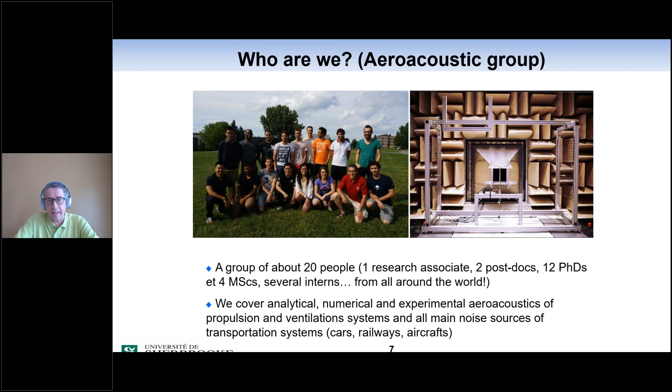And I would say all main noise sources of transportation systems, from cars, railways to aircraft. And we, as I said, we have a nice experimental facility. So this is in the next slide, please.

So if we start with the acoustic experimental capabilities, we have coupled reverberant and hemi-anechoic rooms first. Then we have a unique, very low turbulence level anechoic wind tunnel, so a very quiet wind tunnel. We have a PIV laboratory, a supersonic blowdown facility that you see at the bottom right. And we have skills in different experiment fields, like far field noise, wall pressure fluctuations, hot wire anemometry. We're able also to do some flow visualization, from Schlieren techniques all the way to tomographic PIV.

Now, in terms of numerical expertise, it goes from RANS to LES to DNS, and you have an example at the top right, using both Navier-Stokes and Lattice-Boltzmann methods. Now, in terms of analytical expertise, we have long-term research on analytical modeling of airfoil, fan, and turbomachinery noise over 20 years. This is in large part due to a very strong industrial partnership, excellent relationship. For example, I had 3 different industrial chairs with different aerospace partners.

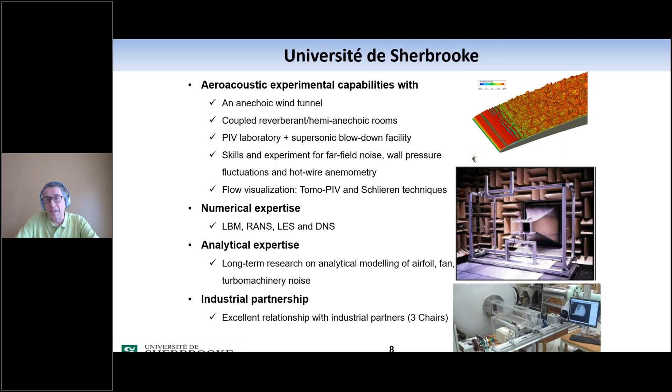So next slide, please. So this is all for dealing with aeroacoustics. So what is aeroacoustics? Aeroacoustics is basically the noise coming from turbulent flows, in contrast to vibroacoustics, where it comes from the vibration of structures, for example.

So as we are dealing with turbulent flow, we can decompose this turbulent flow into gusts. This is the sketch I'm showing on the left. So this is my blue gust here hitting a profile or rotor blade. And this will create an unsteady loading on the blade, which are equivalent sources. This is the red part, and this will propagate to the far field as an acoustic wave. This is my green part.

And you can do that in 3 different steps, starting from a very simple basic analytical approach all the way to fully numerical, the direct approach. And of course, it comes with increasing computational cost.

Now, in the case of the direct approach, we simulate everything. We simulate the sources, but also the propagation. But still, we are usually limited to near field, so we need to do some kind of propagation with the porous Ffowcs Williams-Hawkings analogy, for instance.

Now, if we want to be a little bit cheaper, we can use a hybrid approach where we basically resolve the aeroacoustic sources, in the source region, in a limited domain, and then we propagate again with a propagator, which can be a linearized Euler solver or acoustic analogies. And in my group, we use mostly acoustic analogies, as I will show later.

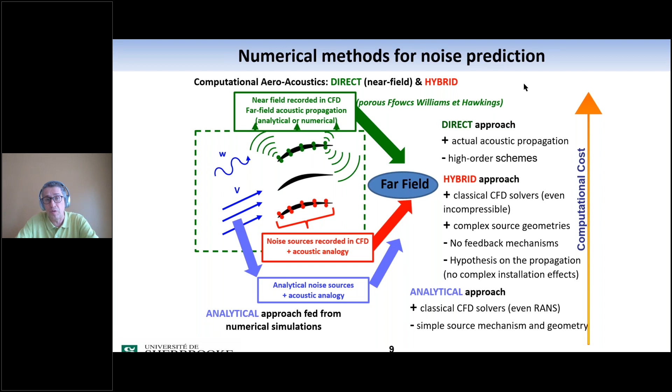So next slide, please. So if we do that, we start from RANS simulations that are used for performance prediction. This is what is being done regularly in industry, and then we feed that into some source modeling, analytical source modeling, that will be the sources for the analytical aeroacoustic models, which are again Ffowcs Williams-Hawkings or acoustic analogies in frequency. And this will allow us to predict tones and broadband noise.

And we've developed, I would say now, a commercial code, a commercial software called OptiSound that is being commercialized by Optis. And you can find more detail on that on the website at the bottom right. And this is for axial machines only, as I show here.

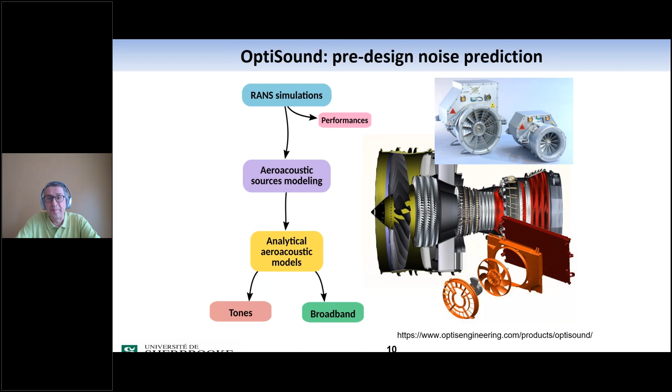Next slide, please. Now, if we move on to the different projects, a first project we achieved in aerospace was to do realistic jet noise prediction. And you see at the top that we were able to simulate complete dual stream nozzles, like you have for example in the scaled CFM56 that we show on the right.

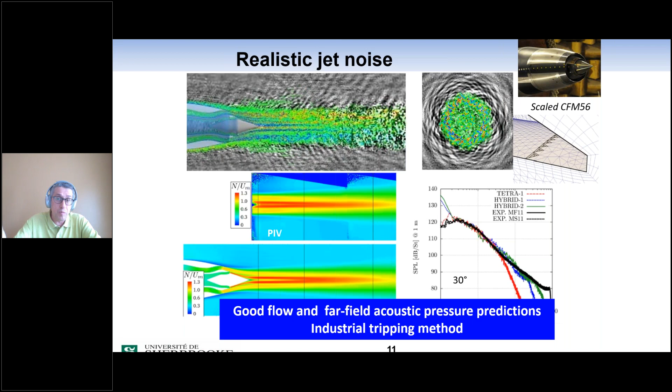So this is an experiment that was done at Onera, and we reproduced the experiment in simulation. And this is the top picture where you see the turbulent jet with the acoustic field coming out from the jet. And we validated that with some PIV measurements for the aerodynamic part, and then with some far field acoustic directivity measurements. And we have good flow and far field acoustic prediction. On top of it, we provided an industrial tripping method to be able to achieve that, and you see that at the top right.

Next slide, please. The second project is basically the prediction of the noise of high lift devices.

We started by predicting the flow correctly, shown at the top with the 3-element L1T2 configuration, where the pressure distribution on the main element was well predicted. Then we used large eddy simulation to predict the noise sources and far field, shown at the bottom, with the turbulent eddies grazing along the plate and interacting with the flap, generating noise through the interaction between the two elements.

We were able to predict the interactions of profile and flap in this case, but also slat and profile, and consequently the noise. We have also developed an analytical model for flap noise with diffraction effects.

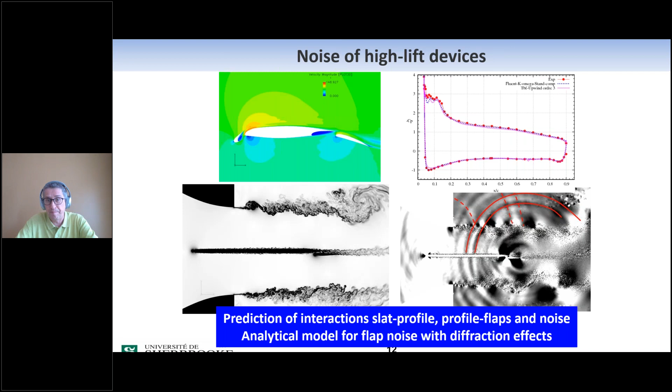The third project is the transonic outflow valve noise prediction. This valve, the OFV, is what pressurizes an aircraft and is usually located at the end of the aircraft. We built a test bench using my blowdown supersonic facility shown previously, where we perform Schlieren and pressure measurements.

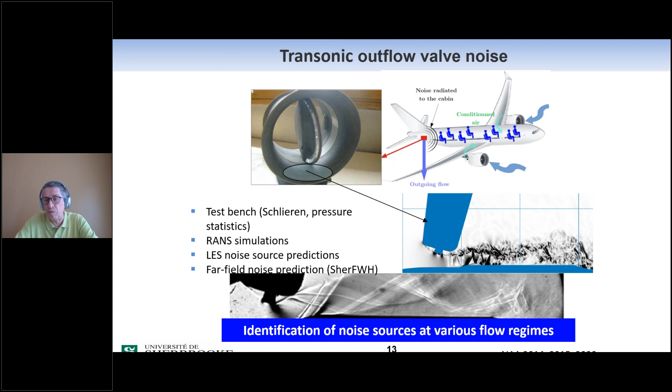We then performed simulations of this facility with both RANS and LES. The LES prediction is shown on the middle right, showing the noise source prediction and the consequent noise propagation, while at the bottom is a Schlieren picture of the experimental part. We were able to identify the noise sources at various flow regimes.

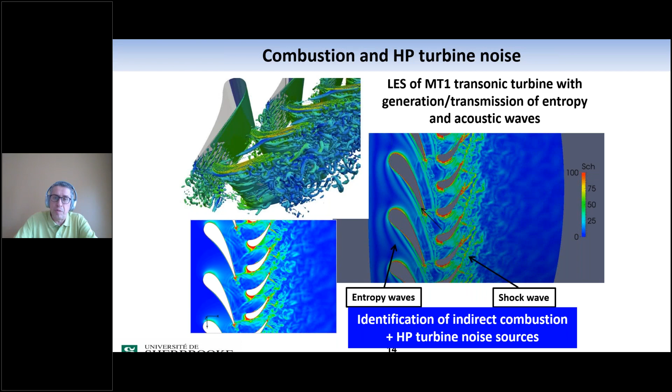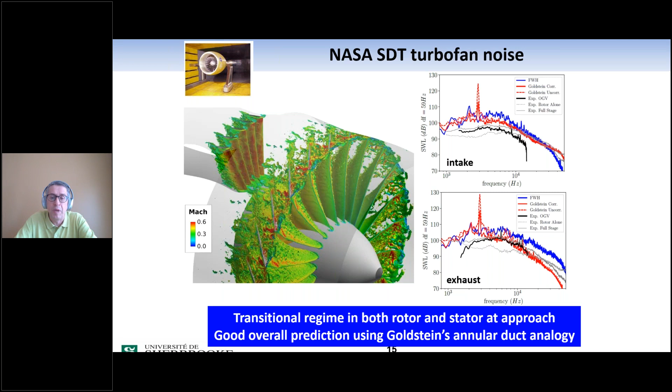The gray and black curves are the measurements, the blue is our free field prediction, and the red ones are our annular duct analogy, the Goldstein annular duct analogy. Using this analogy, we have a good overall prediction. Looking at the structures in the LES, we have proven that we have a transitional regime in both the rotor and stator at approach.

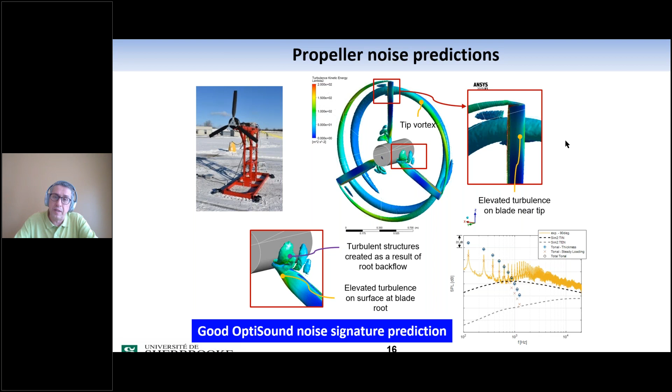The dashed black line on the right is compared to the experimental orange spectrum, and we are matching quite well the high frequency part. We then added tonal noise prediction, for thickness and steady loading, and we are predicting nicely the first tones as well.

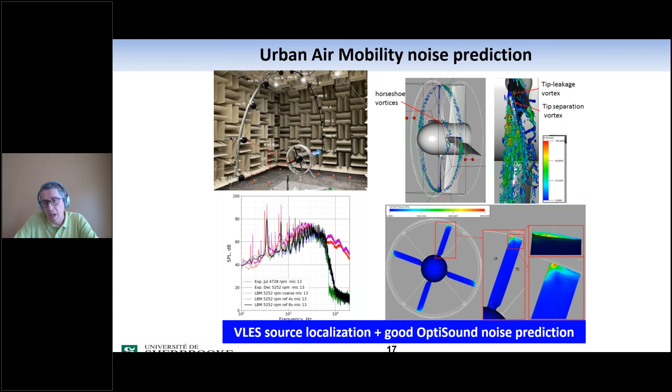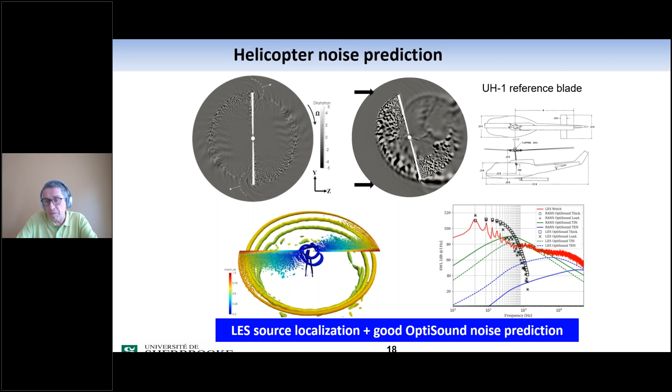Thank you very much.

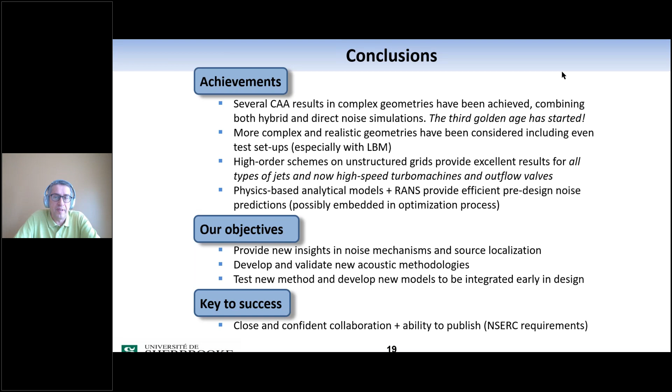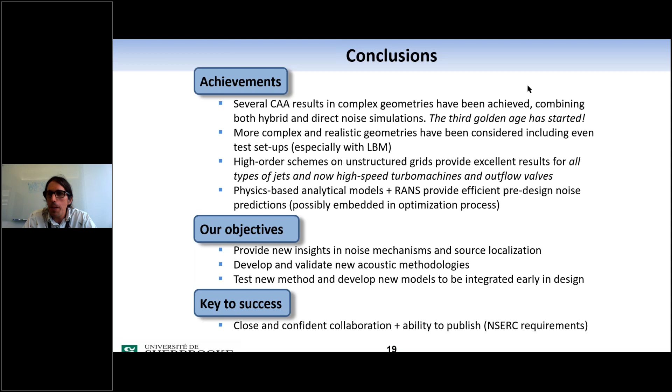Thank you very much, Stéphane. It was a very interesting work. Now we'll move on to Eric.

Yes, hi everyone. My name is Eric Villeneuve, and I'm here to present the drone rotor icing investigation that is going on at the lab at the moment.

Next slide, please. First, I'm going to do a very quick explanation of the Anti-Icing Materials International Laboratory. We are in the Icing Research Lab attached to the University of Quebec at Chicoutimi since 1987, and we study icing phenomena and cold climate related problematics for various industries like the aerospace and the energy industry.

We are also the only laboratory in the world accredited to perform the aerodynamic qualification of anti-icing and de-icing fluids for aircraft ground de-icing.

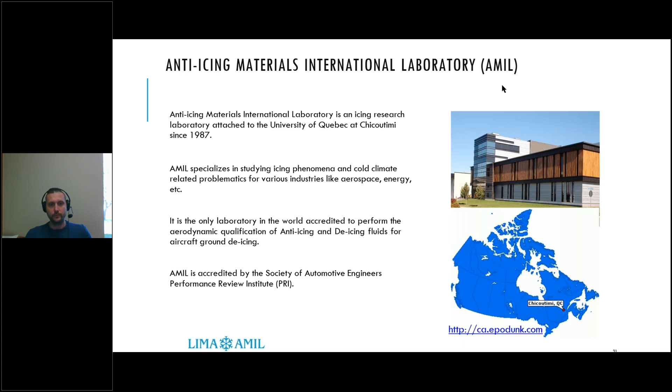And we are accredited by the Performance Review Institute of the SAE to do that.

We have two refrigerated wind tunnels: a research tunnel capable of simulating icing precipitation with wind speed up to 100 meters per second and temperatures below -20 Celsius degrees, and a second tunnel dedicated to the qualification of aircraft ground de-icing and anti-icing fluids, in which we simulate the takeoff of a Boeing 737 Advance to measure the effect of those fluids on aerodynamic performance during takeoff.

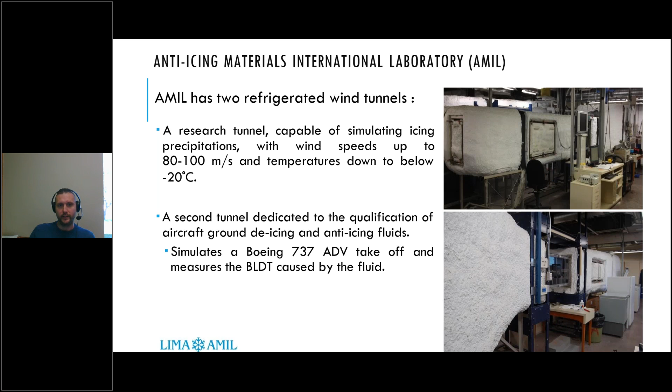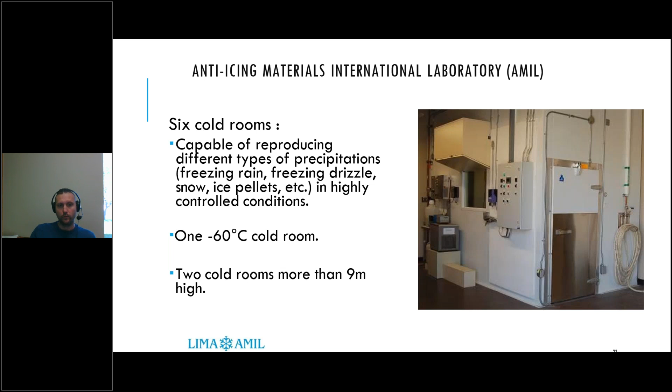We also have 6 cold rooms capable of reproducing different types of precipitation - freezing rain, freezing drizzle, snow, ice pellets - in highly controlled conditions. We have one -60 Celsius degree cold room and 2 cold rooms more than 9 meters high for different testing.

So today for this presentation, I'm going to mainly discuss the hover flight icing tests done on the APT-70 drone rotor at the laboratory. This drone has a vertical takeoff and then transitions into aircraft mode for forward flight. There were 3 main objectives for this project: the development of the experimental apparatus, a preliminary investigation of the icing effects on rotor performance, and preliminary tests of ice protection solutions. I'll also briefly talk about the forward flight wind tunnel testing that is to come.

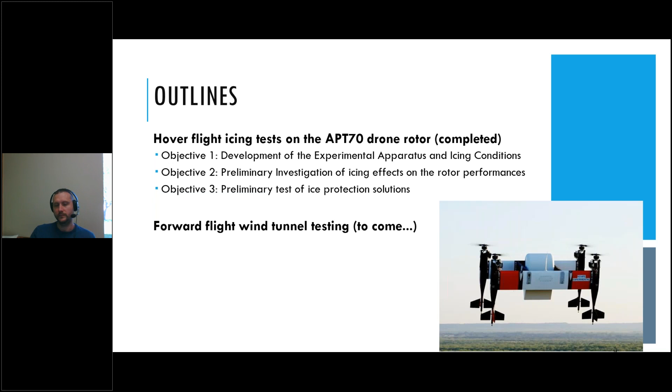So the first objective for the hover flight test was to develop a new experimental apparatus and to define the icing conditions in the cold room.

We installed the rotor in a 9 meter high cold chamber where the air temperature can be controlled between -35 and 5 Celsius degrees. We have icing nozzles located on the chamber ceiling to generate an icing cloud. The icing test section has an area of 2 meters by 2 meters, surrounded by plexiglass doors. The rotor was installed on top of a pneumatic cylinder, which can be extended vertically using compressed air to test at different heights - different distances from the ground and from the nozzles.

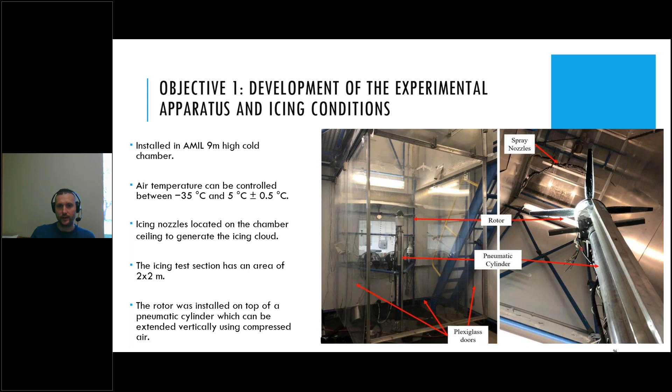To define the icing conditions, we used the FAA/AR-09/45 document because we wanted to test both freezing rain and freezing drizzle precipitation. For the freezing drizzle, we went with a droplet size of 120 microns, while for the freezing rain, we increased the droplet size up to 800 microns - very large droplets for precipitation. The temperatures selected were -15, -12, and -5 Celsius degrees.

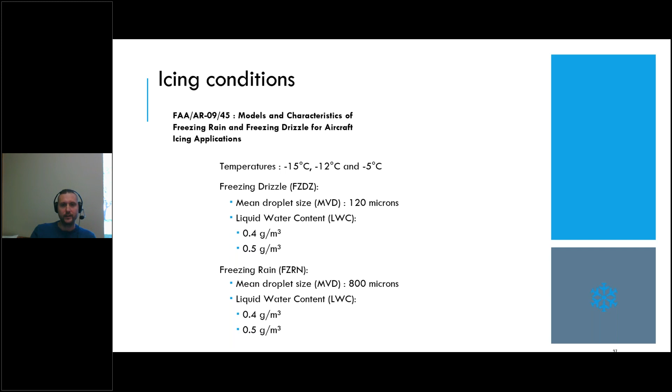For the rotor test conditions, we went with an 81% scaled down version of the APT-70 drone rotor - 4 blades of 25 centimeters long for a total rotor diameter of 66 centimeters. We decided to test 3 different thrust levels: low, medium, and high thrust.

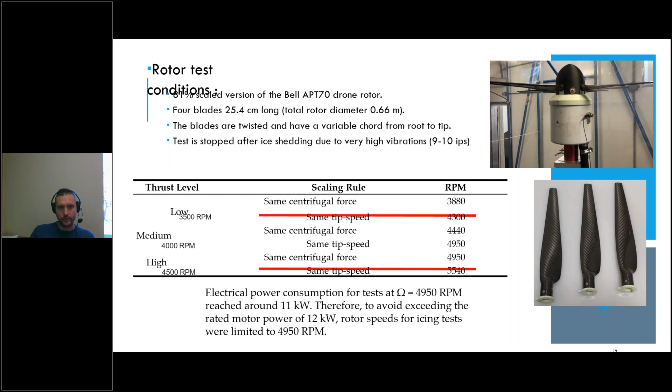For the scaling rule, we used 2 different scaling calculations: same centrifugal force and same tip speed. So for each thrust level, we had 2 corresponding RPMs for the scaled down version of the rotor. We did not test 4,300 RPM because it was too close to the 4,400 RPM, and we did not test 5,500 RPM because it was too close to the electrical power consumption limit of the motor used.

At some point there's going to be shedding of the ice on one or more blades, and then vibration levels will increase due to the imbalance, and we will attain vibration above the safety limits given by the manufacturer, so we have to stop the test at that point.

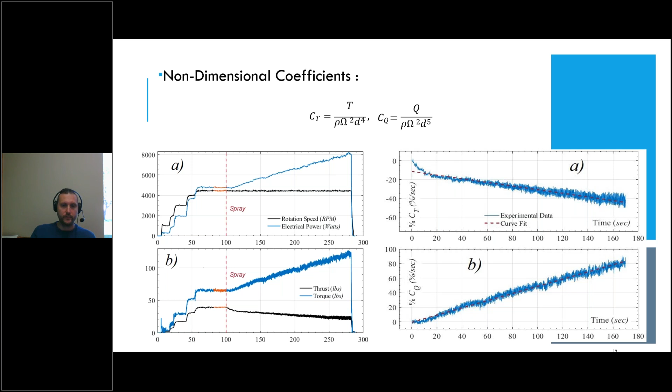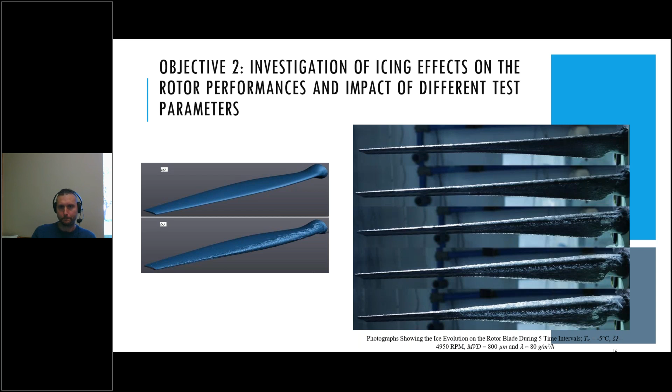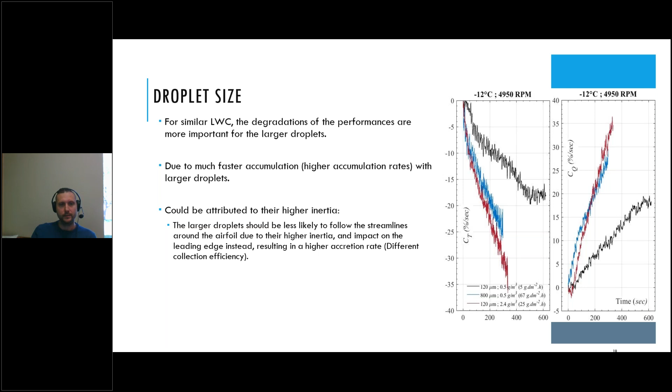This seems to be in line with the accumulations observed towards the tip of the blade. You see two examples of ice accumulation with two different droplet sizes. At the tip of the blade, the effect of the tip vortex is a lot more pronounced with the smaller droplets, being more impacted by the flow surrounding the rotating blades than for the larger droplets.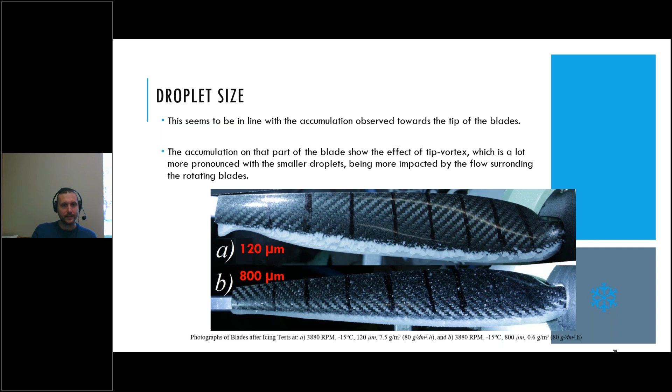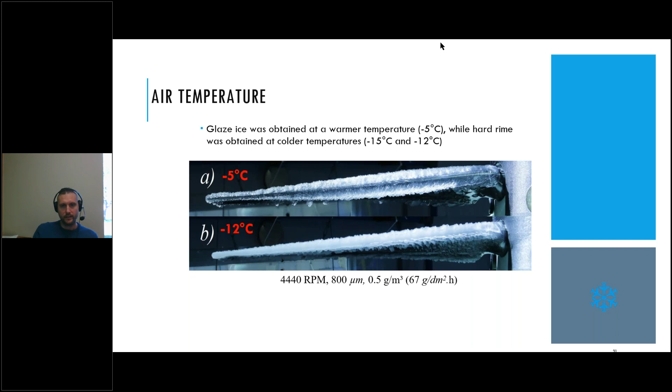Then we'll look at the effect of the air temperature. The first thing we observe is that more glazed ice was obtained at warmer temperatures, at -5 Celsius, a clear glazed accumulation, while for the lower, colder temperatures, we obtain more of a hard rime accumulation, more of a white ice.

For the air temperature, for droplets of 120 microns, the decrease of air temperature did not generally affect the outcome of the icing test. Even if the ice accumulation type was different, the performance degradation was similar between the different temperatures, and this was similar to observations made by experiments at the NRC on hovering UAS experiments, as you can see in these pictures. So it was consistent with their results as well.

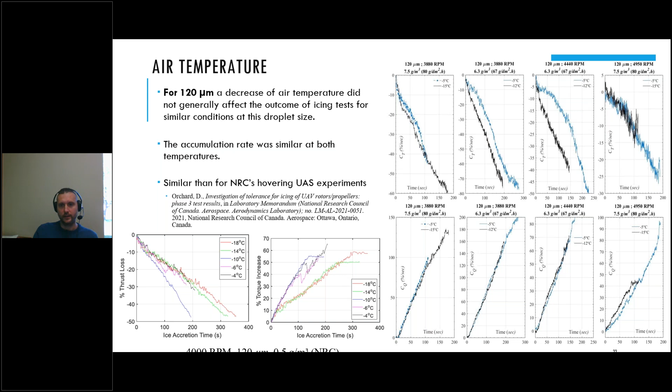When we looked at the results for the 800 micron test, we saw that at lower temperatures, the degradation of thrust was far more rapid, and the torque increased more rapidly at the lower temperatures. You can see on the plots here the blue line for -5, while the black line is for -15, showing the higher degradation.

What we observed during post-treatment is that for the larger droplets, almost no ice accumulated at warmer temperatures at the tip. If you look at the pictures, at -5 there's almost no ice at the tip towards the last third of the blade, compared to -12 Celsius. What could explain this is that the larger droplets, due to higher thermal inertia, take more time to freeze and have time to be exposed to the higher centrifugal force toward the tip of the blade before they are able to completely freeze on the blade.

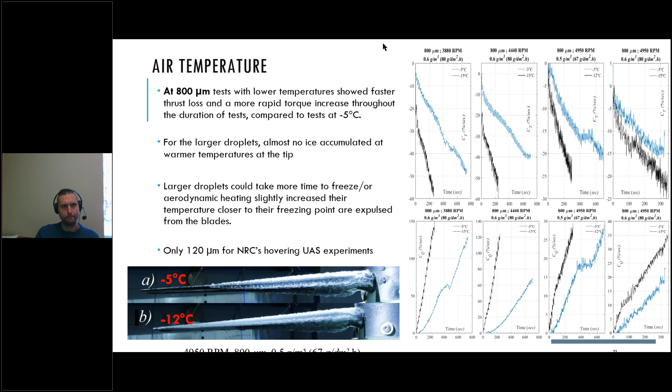The last parameter that I'm going to present is the rotation speed that we also investigated. You see on these plots three different RPMs: the black line is 3880 RPM, the blue line is 4440 RPM, and the red line is 4950 RPM. What we observed is that the performance degradation of the rotor was less severe as the rotation speed was increased. It was also caused by higher ice accumulation at lower rotation speed.

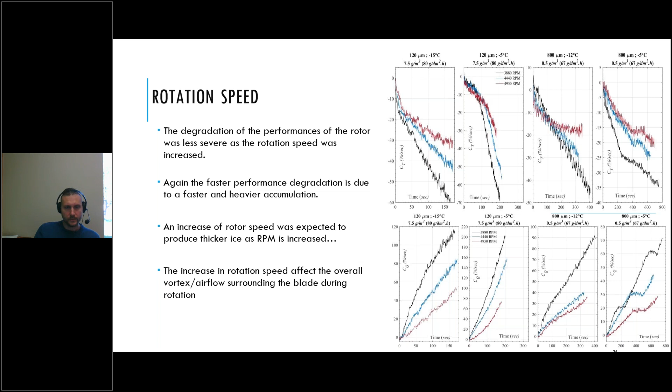This could also be attributed to the effect of higher rotation speed on the overall vortex airflow surrounding the blades during rotation. What was observed is that the increase in rotation speed seems to affect the overall vortex airflow surrounding the blade during rotation, something we want to study further in detail. Those were only preliminary tests, but we see the evolution of ice accumulation, especially toward the tips, as we increase the rotation speed, explaining why there's lower degradation at higher RPM. There's much less ice, especially toward the tip of the blade.

And on the pictures on the left, you see also the effect of the tip vortex on the ice accumulation, which is far less pronounced than for the lower RPM.

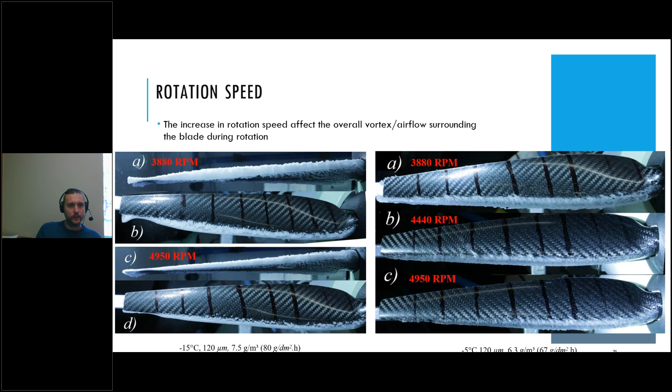So first we tested icephobic coatings. For those who don't know, an icephobic coating is a paint or coating that we apply on the blade that reduces the adhesion of the ice on the substrate. So the adhesion of the ice on those coatings is far smaller than on the bare blade, which allows the ice to shed more quickly.

So if we look at the plot, the black curve shows the results that I presented before, when there's no coating present on the blade, so for the bare blades. We see the fast and significant degradation of performance over time until there's a big shedding event, and then vibration levels increase and become too high, so we have to stop the test for safety reasons.

With the icephobic coatings that we tested, a different scenario occurs. Since the adhesion of the ice on the substrate is far lower, the ice shedding events occur much quicker. The degradation of performance is much lower when the shedding occurs, but also there's less ice - the mass of ice is much less on the blade. So when the shedding occurs, there's less imbalance, and we are below the safety limit, and we're able to pursue testing. What occurs then is that we get some accumulation-shedding cycles.

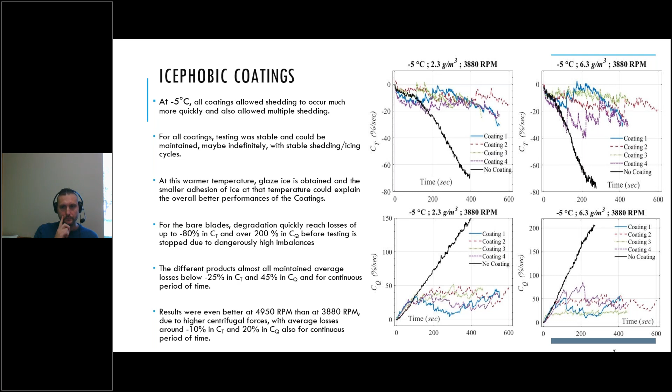We also investigated the electrothermal protection. So we install heating elements on the blades, cover them with aluminum tape for a more even distribution of heat on the blades, install RTDs at different positions to measure the temperature, and then we ran multiple tests at different icing conditions in anti-icing and de-icing mode.

In anti-icing, you completely prevent any ice from accumulating, while in de-icing you allow a certain amount of ice before you turn on the electrothermal protection. Then the ice sheds because you melt the interface between the blade and the ice layer, and then you shut it down again and wait for a new accumulation before turning on the system.

The results are unfortunately still being analyzed, so I cannot present them right now.

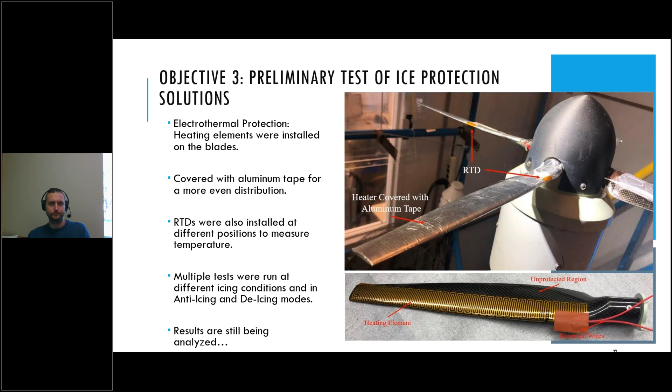So the next step in our experimental testing will be the forward flight in the wind tunnel. This is going to simulate the forward flight of the drone in aircraft mode. We have built a new 36 inch circular test section for the wind tunnel, where wind speeds can go up to 50 meters per second, down to minus 20 Celsius degrees. We have 25 nozzles to create the icing precipitation.

We'll use a stroboscope, high-speed cameras, and 3D scanners to observe and analyze ice shapes, and we perform again multiple icing tests at various conditions based on regulation standards.

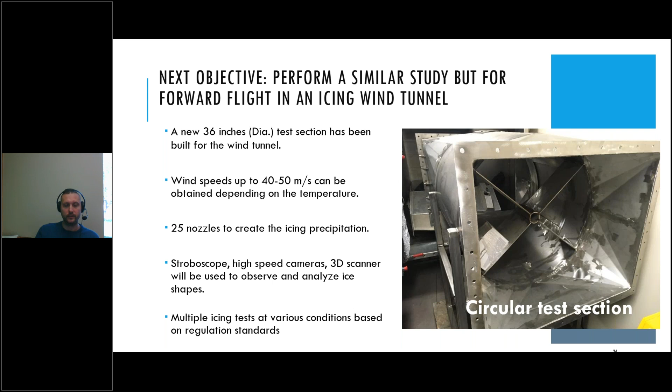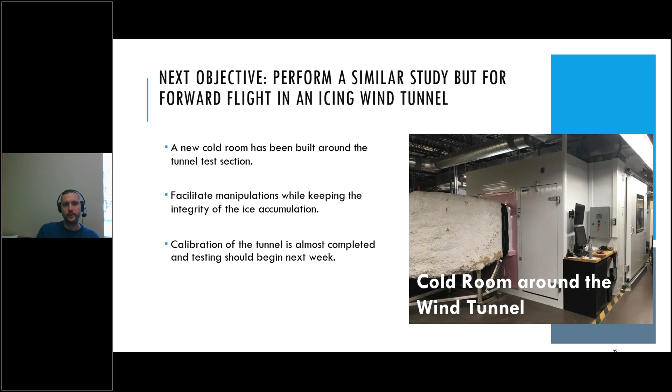And finally, we have built a new cold room around the tunnel test section, so we can remove the blades from the tunnel and then make all the measurements in the cold room without compromising the ice accumulation. Calibration of the tunnel is almost completed, and we will begin testing next week.

So thank you all for listening to my presentation.

Thank you very much, Eric, for this in-depth look at your work. I'm sure this is a test that will be very useful for the industry for future certification of drones.

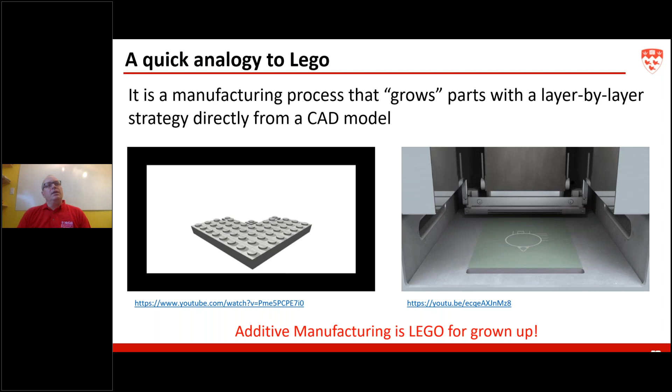If we move to the next slide, we can see a few applications where now people are starting to consider additive manufacturing for fabrication of parts in aerospace applications and vertical systems.

Among the main advantages, you have an example here from the Cobra Aero AM engine blocks. You can see that part of the engine block was lightweighted by the introduction of a lattice - sort of like voids or empty space within the engine block, which reduces the weight.

Additive manufacturing will allow you as well to go with designs of higher complexity and part consolidation concepts, as you can see on the picture on the bottom right, which is a full drone where part consolidation to minimize assembly was put together. That's an existing one that was printed here in Montreal by Fusia Groupe.

We can now start to adapt the production of parts from a few parts, highly prototyped, to serial parts. There are some applications where the economics of serial parts can work.

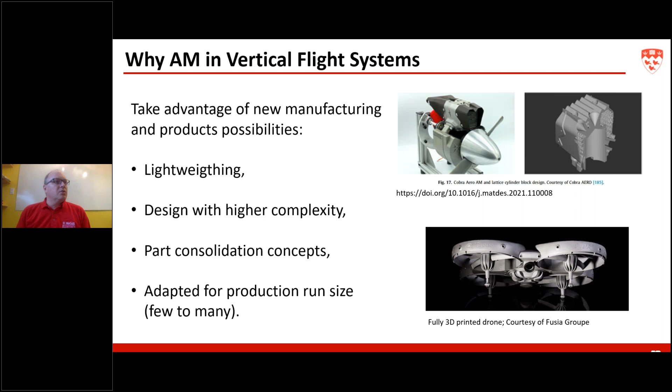If we move to the next slide, we have additional examples here that are closer to the presentation. On the top right you have the transmission casing from a Chinook helicopter that is fully 3D printed. On the left is an engine torque indicator developed by Bell Helicopter Textron Canada to host instruments that are used - this was a titanium 6-4 component that was manufactured.

Just to show you the versatility that you have, on the bottom right is an example of a composite 3D printed blade that is used by Bell Helicopter.

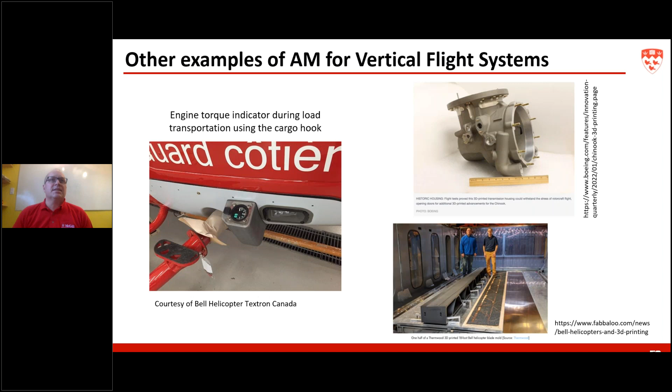So if we move to the next slide, this is basically now moving to my research team and what we do.

Our research team is currently hosting 25 researchers. This is a picture from a couple of years ago during our Christmas celebration - 2 research associates, 1 technician, and a series of grad students. We're funded by over 20 industrial sponsors, and if you want to see the lab website, the address is there.

So these are the activities. By training I'm a person working in welding and I've done powder metallurgy. If you combine the field of welding and powder metallurgy together, you're obtaining 3D printing. We're working on process optimization - how we can fabricate new parts and how we can try to think outside the box compared to what everybody is doing.

I'm going to show you a couple of examples later on where we specialize, for example, in fabrication of components with lower residual stress, texture control, etc.

We're working as well with alloy development. The additive manufacturing field has different solidification conditions than casting and welding, so we have to think a bit differently. We're working as well on how to optimize and engineer the powder that is the feedstock for additive manufacturing, and on metal powder sintering and rapid welding, which are not going to be covered today.

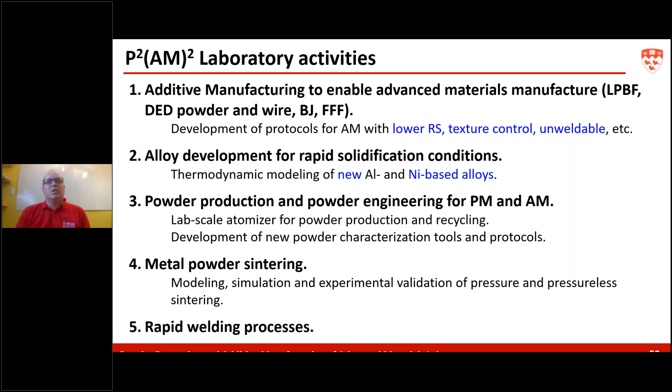If we move to the next couple of slides, these are the suite of equipment. As I mentioned before, we have a very holistic suite of equipment to characterize and optimize powder to maximize their printability and sinterability. We have a few examples here of facilities that are in the lab.

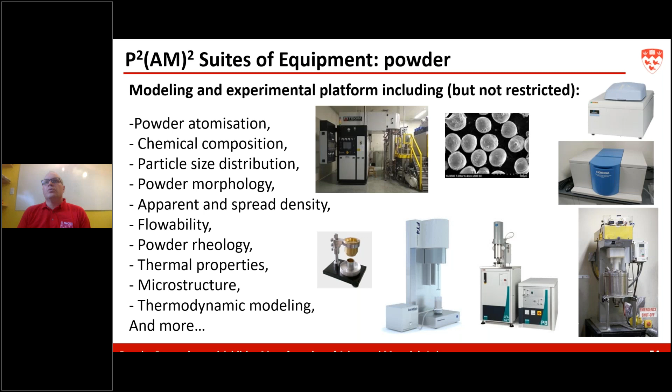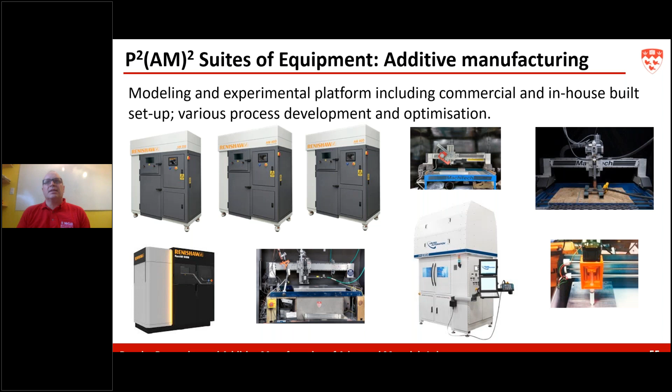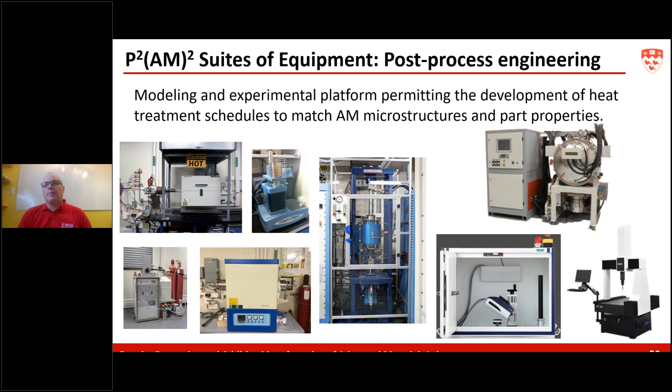If you move to the next slide, we'll present a couple of examples that we've done with aerospace companies.

So as I mentioned before, 3D printing really started, if you're looking at commercial adoption, about 10 years ago at most, and the goal is to develop heritage. In our lab, we're working with a very large consortium on various projects to demystify and understand the real capabilities and how we can improve the process. We need to create the story on the process, the applicability, the mechanical property, reliability, etc. So a lot of companies typically bond together or collaborate to reach those outcomes - it's less risky for them than going alone in this adventure.

So if you move to the next slide, we're going to see 4 examples of parts that we've done and published. The first one originates from a CRIAQ program a couple of years ago. This is a large-scale aerospace structure you can see here - the CAD model on the left, and the final 3D printed model on the top right of the slide.

We fabricated the entire component. This was qualified from TRL2 to TRL7-8. I'd say the part met the specification and was ready to launch. At the beginning, when this part was fabricated, it had a buy-to-fly ratio of about 31. Now with 3D printing, within 2.5 days, we managed to bring this part to a buy-to-fly ratio of 3.2. You can see the sequence here: we fabricated the bulk of the part, then looked at its geometry, dimensional, and tolerance, then characterized microstructure and mechanical property to end up with the final component.

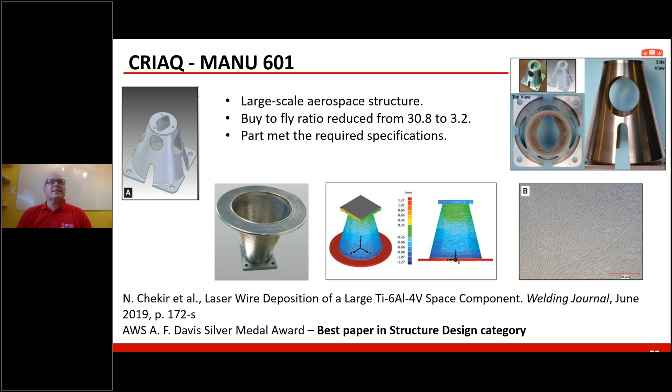Next slide, please. This is something fairly rare - only a few people in the world are working on this. With the 3D printing process, there's a possibility of texturing the microstructure. Here's an example on impellers for pumps. Depending on how you align the atoms during solidification, you can texture the part with what we call in the jargon the 100, 110, and 111 orientations.

You can see on the right side of this graph the different mechanical responses depending on the orientation. So you can now think of fabricating, at fairly low cost, components that have a high texture and specific properties that conventional material cannot give you. On the bottom left is a response for corrosion - again, if you tailor the way the atoms are put together, you can maximize corrosion resistance. So there's an opportunity here to have materials superior to conventional wrought fabrication.

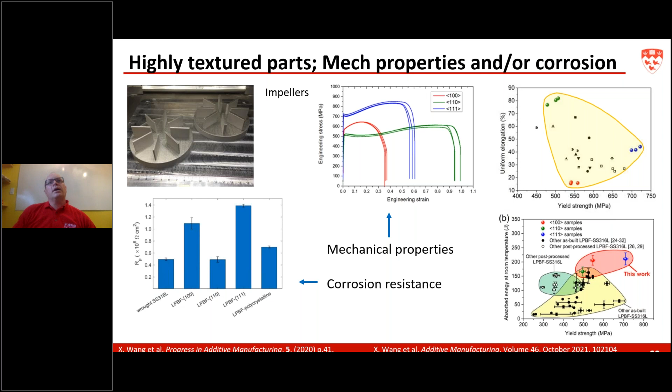The next one will be quite rapid - next slide, yes. I just want to show you the importance of controlling residual stress. Like welding, the development of residual stress is quite important during processing, and if you cannot control it, you're going to go off specification on geometry, dimensional, and tolerance. So the example here focuses mainly on the center part, a diamond tube, which seems a simple shape but is actually very tough to fabricate without distortion.

The example on the left shows what conventional 3D printers give - the type of distortion you can see from the map at the bottom. Once we apply the algorithm we developed, the dimensional and tolerance was within 200 microns from the specs, which was quite nice. Now we can think of opening new geometries to fabricate. As a reminder, a human hair oscillates between 80 and 200 microns, so the part was quite precise in its fabrication.

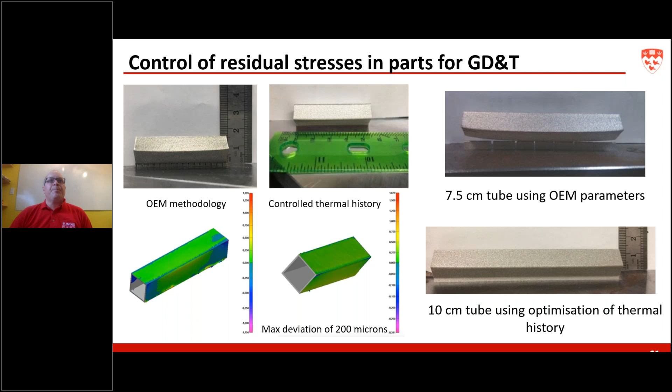The next slide finishes on the example of alloy development - turbine tip repair is quite an important field. With some sponsors, we've worked at developing new alloys that have what we call, again in the field, high gamma prime - really high strength at high temperature. We've developed a few alloy compositions that can now be used to refurbish the tips of blades once they are worn. What you have here are a couple of results we've obtained: extremely high mechanical properties at high temperature.

The creep property is equivalent to a René 80, which is a standard alloy used for blades. And interestingly, if you look at the graph on the bottom right, the oxidation resistance of the new alloy that was developed is way superior to the René 80.

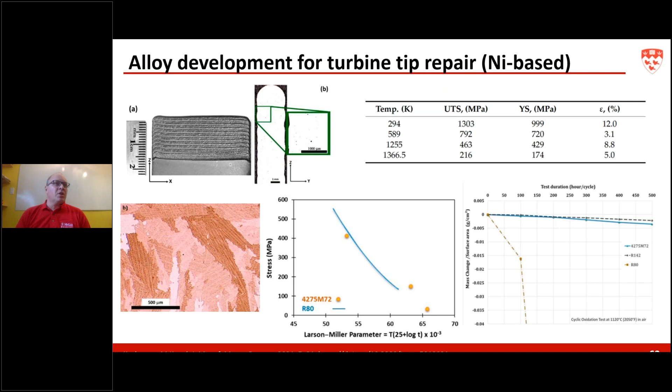So we can expect less damage for a part that has been repaired with this type of alloy. These are 4 examples that we've worked on, among many others with the group and with a few companies. Now a few things I was asked to comment on, starting with the importance of the industry-university relationship.

In my opinion, this is extremely important in the field of AM because it's a very new field in terms of adoption of the technology. It really needs to de-risk the technology and help people understand what's beyond it, so they can use it and be certain of the properties and reliability of the component.

So we can demonstrate with those types of consortiums, large bundles of people, that AM is real. That also allows the development of supply chain pillars that are really important. It's good to have a good design and a good demonstration that AM works, but we actually need to have the parts.

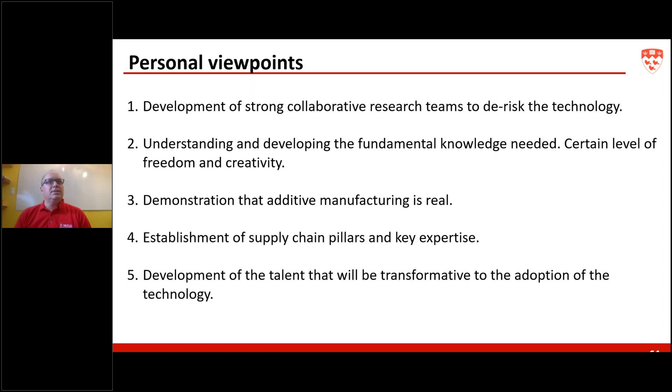The last thing I'll comment on is the key element, and I think some of my previous collaborators touched on it. It's very important to talk the same language, and it's very important to come up with a problem-solving mindset.

Yes, of course, all of this is leveraged with NSERC money or other industry funding, so papers have to be written, but that should not be the primary goal. We should be there to solve the problem, work with the company, and that's going to allow us to understand the field better and propose a better solution.

And finally, timing is everything. So deliver on time, high quality results.

In a nutshell, as a conclusion, additive manufacturing is becoming a key player in many industries. We're going to see more and more of those parts in vertical flight systems for helicopters, drones, etc. And we're going to see this even amplified when we have to work with light wing vehicles for hybrid and electrical models.

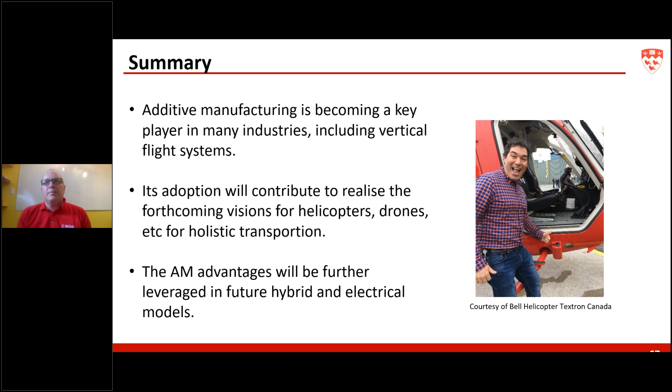So thank you very much, and I'll be pleased to entertain questions. Thank you very much, Mathieu.

We covered a lot of subjects in such a short time. I think we covered the 3 important aspects I wanted to talk about, which is that industry and university collaboration is mainly, in my opinion, about 3 things: analyzing subjects like we've seen in Stéphane's presentation, trying to figure out how sound works and how it's propagated, and with Eric's presentation, we saw what a test campaign using the university looks like, but with collaboration from industry.

And finally, we covered the subject of developing new materials and manufacturing methods, which are all very important things that are key for the development of new technologies. So we have a few minutes for questions.

I'll start with a question for Eric. You're working with various industries on icing, including Hydro-Québec. Is working with aerospace any different?

It depends. We work on different project configurations, from completely private funding projects to grants with public financing. This changes a little bit the kind of data you're going to get, and also the scope of the studies. Sometimes it's more of a test campaign with preliminary results to show some effects; sometimes you go deeper into the theory with PhD students and stuff like that. So it depends on the type of collaboration you get, and you decide with the clients, either full R&D 3 or 5 year projects, or more of a test campaign of 1 to 2 years. That's mostly what's going to change in what we do.